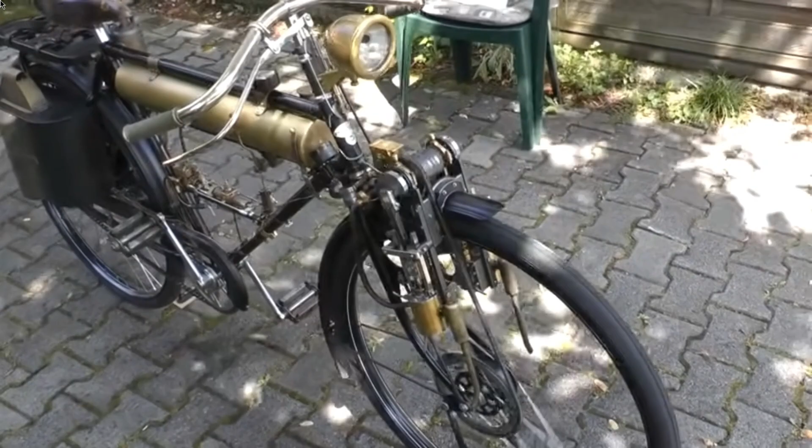First of all, the greatest thing about steam engines is that the water used in the steam engine typically is recycled and returned to the ecosystem. Here is how it typically works: water usage in a steam engine. Water is heated to produce steam, which is then used to drive turbines or pistons for mechanical work, such as electricity generation or locomotion in trains or steam cars. As the steam expands and does work, it loses some of its heat and energy and condenses back into liquid water.

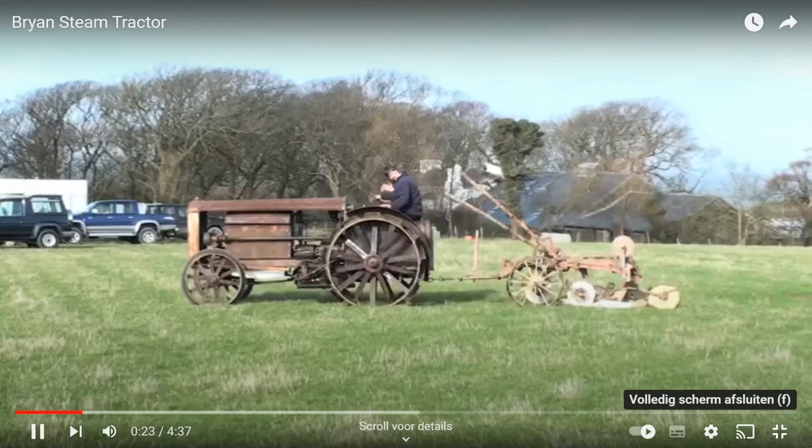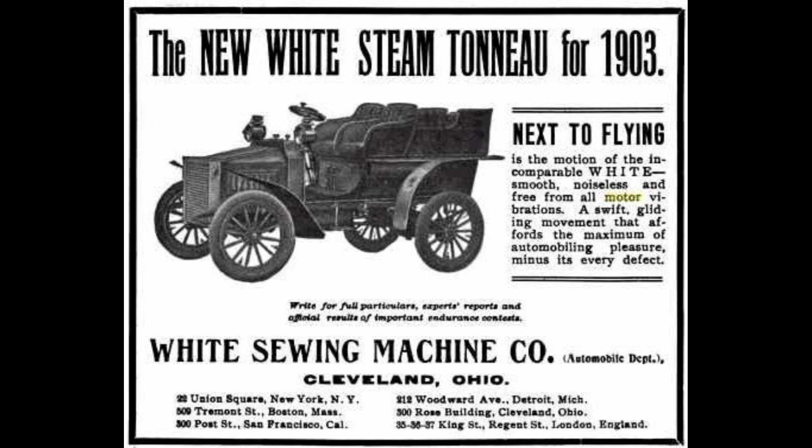Condensate recovery: the liquid water produced from condensed steam, known as condensate, is collected and often recycled within the steam system. Condensate recovery systems capture and reuse this water, feeding it back into the boiler to be converted into steam again. This recycling process minimizes water consumption and ensures efficient use of resources. Water quality and treatment: before being reused, condensate may undergo treatment to remove impurities and contaminants picked up during the steam cycle. This treatment process typically involves filtration, chemical treatment, and sometimes additional purification steps to ensure the water meets the quality standards.

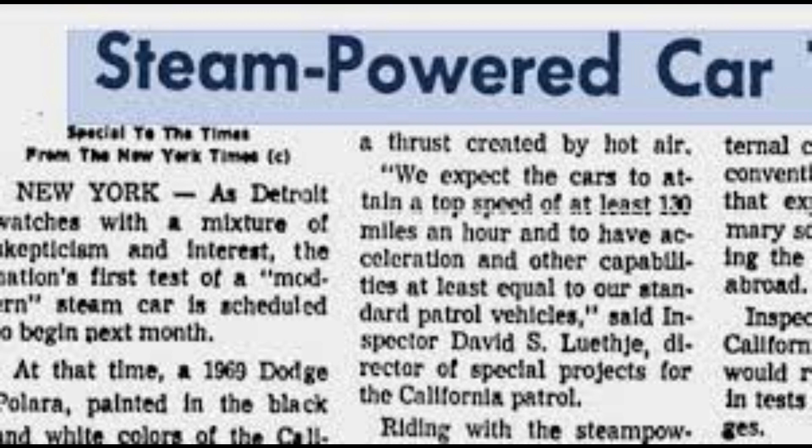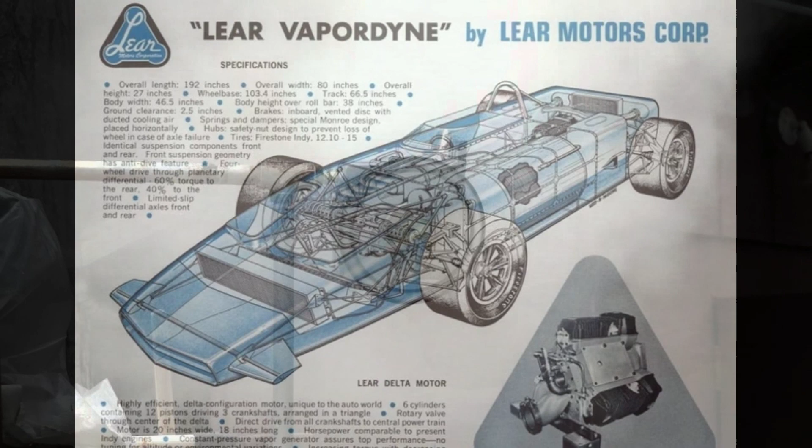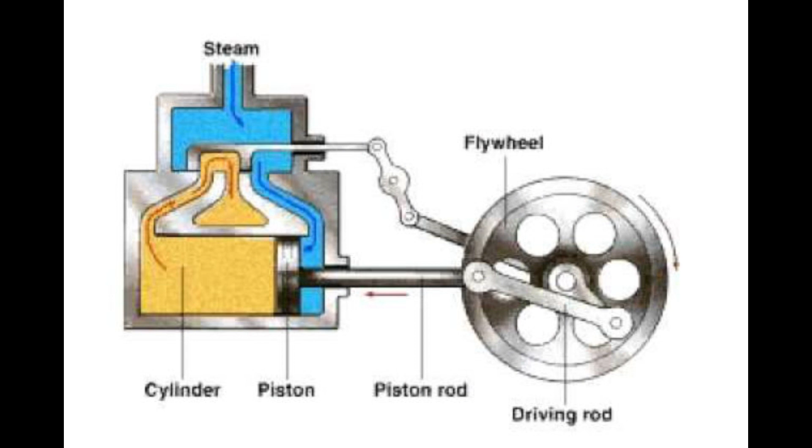Discharge into the ecosystem: while some water may be lost due to evaporation or blowdown from the steam system, the majority of the condensate is returned to the ecosystem. In industrial settings, condensate may be discharged into wastewater treatment systems or released back into natural water bodies, such as rivers or lakes, after treatment to meet regulatory requirements. Environmental consideration is essential to manage the discharge of condensate responsibly to minimize environmental impact. Proper treatment and monitoring ensure the discharged water meets water quality standards and does not harm aquatic ecosystems or human health.

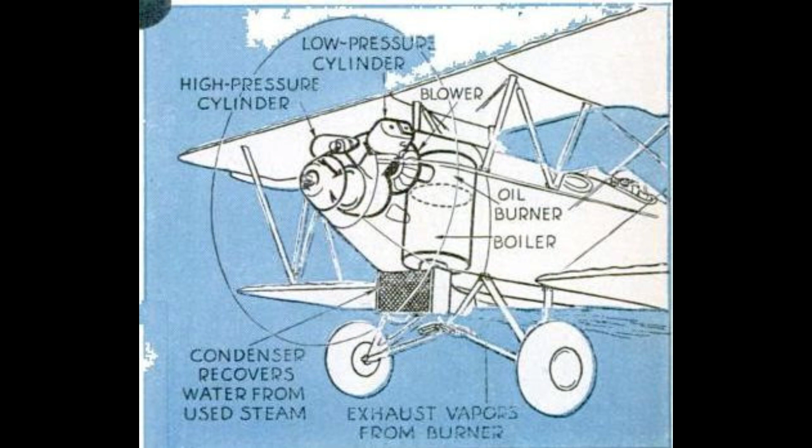Overall, the water used in steam engines undergoes a closed loop cycle where it is recycled and returned to the ecosystem with minimal waste. This approach maximizes water efficiency and minimizes the environmental footprint of steam engine operations.

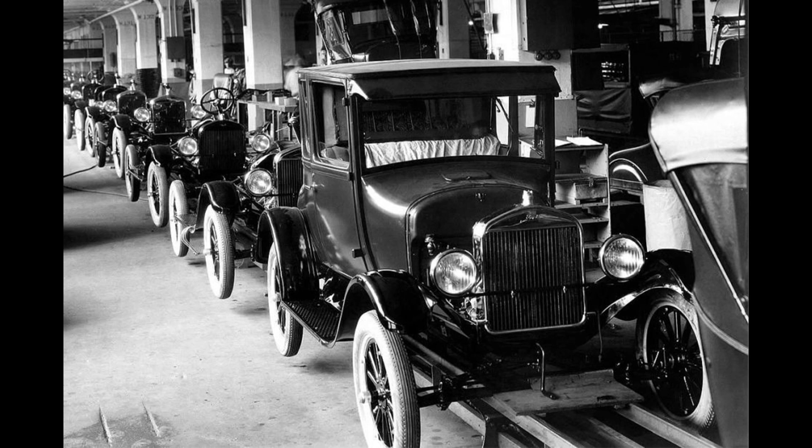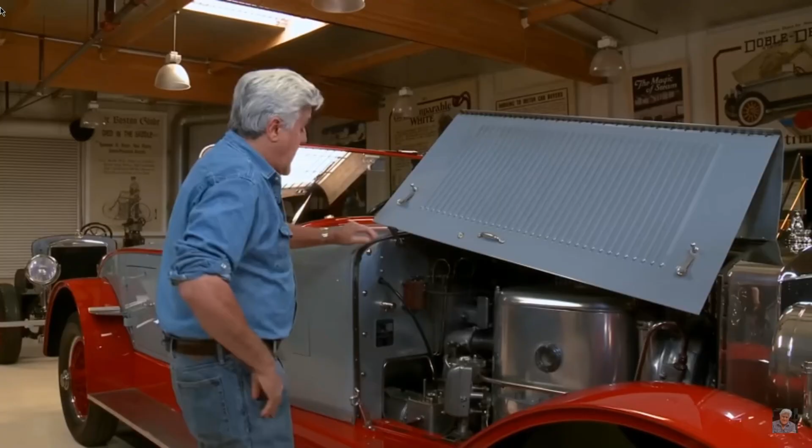In the vast landscape of technological evolution, few inventions have left such a decisive mark on human history as the steam engine, originating in the 18th century, but if you ask me, way before. These mechanical marvels ushered in the Industrial Revolution, transforming the world and catalyzing unprecedented progress. But while many may perceive steam engines as relics of the past, their potential in the modern era remains remarkably relevant, particularly in the pursuit of sustainable green energy solutions.

At their core, steam engines harness the power of steam to generate mechanical work by heating water to produce steam, which then drives pistons or turbines, converting thermal energy into motion. This fundamental principle may seem archaic, yet its applications in today's world are both diverse and promising.

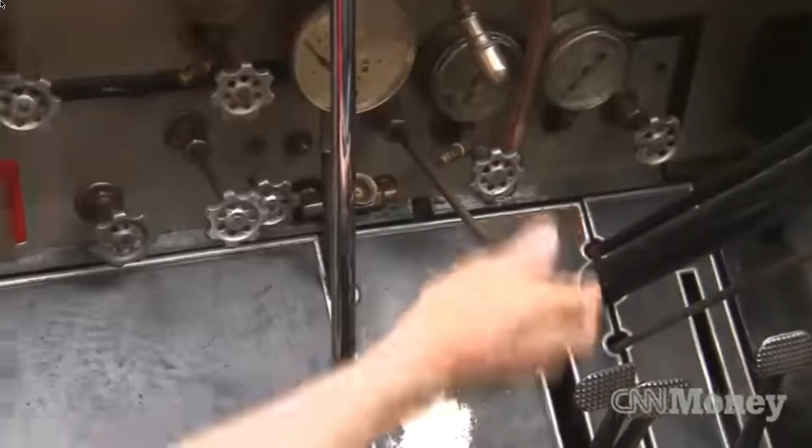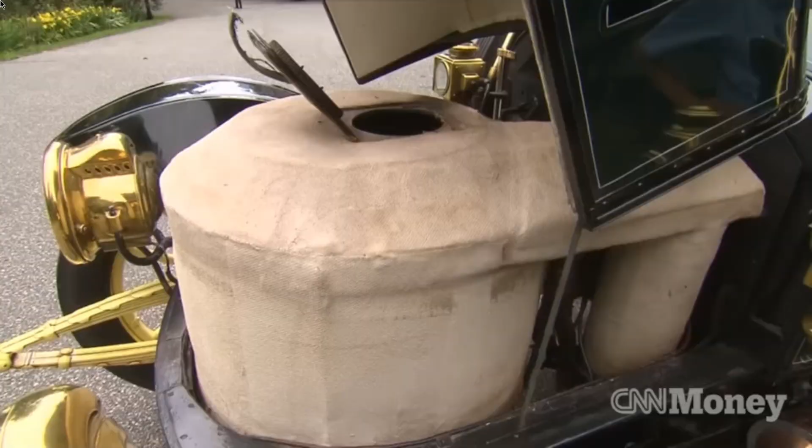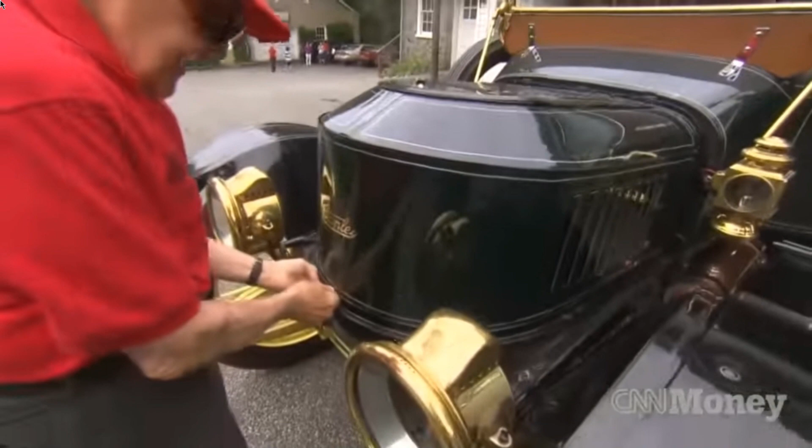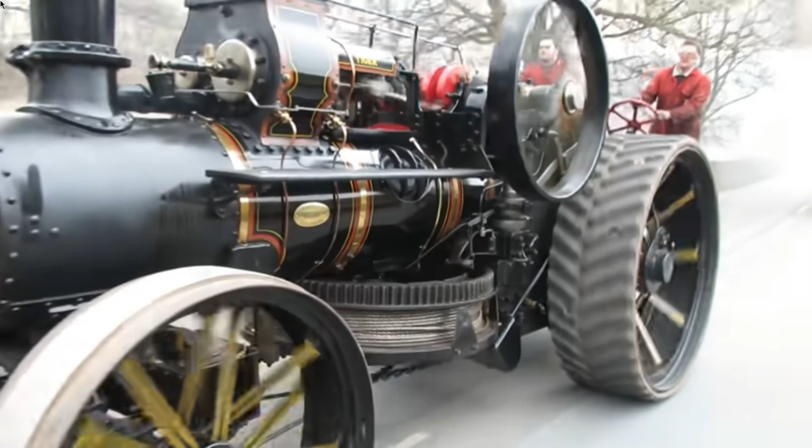Consider the pressing global imperative to transition away from fossil fuels and mitigate climate change. Steam engines offer a compelling alternative. Unlike traditional combustion engines that rely on finite and polluting fuel sources, steam engines can be powered by renewable inputs such as biomass, solar heat, and geothermal resources, presenting a pathway towards decarbonization and reduced reliance on non-renewable resources.

Furthermore, the versatility of steam engines extends beyond electricity generation. In industries ranging from manufacturing to transportation, these engines can drive a wide array of machinery and vehicles. Picture a modern steam-powered locomotive silently gliding along a railway station, emitting nothing but water vapor. Envision industrial processes powered by clean, renewable steam, driving productivity without compromising environmental integrity.

Moreover, the integration of steam engines with emerging technologies like advanced materials and digital control systems opens a new frontier of efficiency and performance. Through innovations in materials science, engineers can design steam engines that operate at higher temperatures and pressures, maximizing energy conversion efficiency. Sophisticated control algorithms optimize steam systems, ensuring seamless integration with renewable energy sources and grid networks.

Perhaps the most compelling aspect of steam engines lies in their inherent scalability. From small-scale decentralized applications to large-scale power plants, steam technology can be tailored to meet energy needs of diverse communities and industries. In regions lacking access to conventional power infrastructure, decentralized steam systems offer a reliable and sustainable energy solution, empowering local communities and driving economic development.

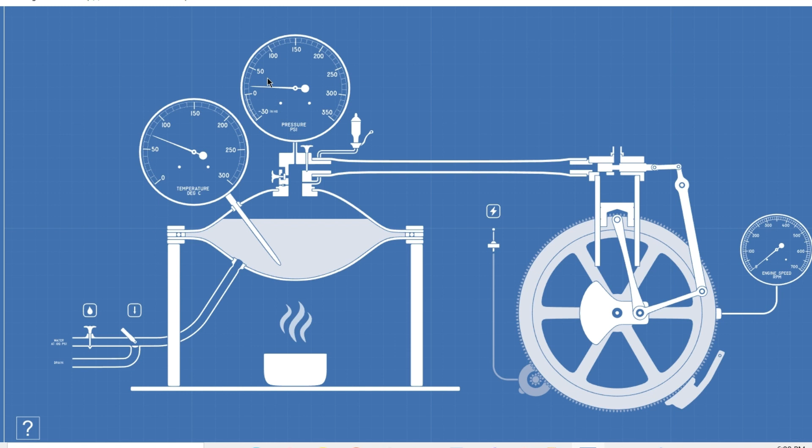The age of steam may have dawned centuries ago, but its brightest days lie ahead, fueled by the boundless potentials of green energy and human ingenuity.

Improving the efficiency of steam engines while reducing water consumption is a key challenge in modernizing this technology for clean energy. Here are some examples of how this can be achieved. With advanced boiler system design, utilizing advanced materials and engineering techniques can enhance boiler efficiency, allowing steam engines to extract more energy from the same amount of water. High efficiency boilers with improved heat transfer surfaces can minimize heat losses and optimize steam generation.

Also, condensing systems: incorporating condensing systems into the steam engine enables the recovery of water vapor from exhaust steam by condensing it back into liquid water. This process recycles water within the system, reducing overall water consumption and increasing efficiency.

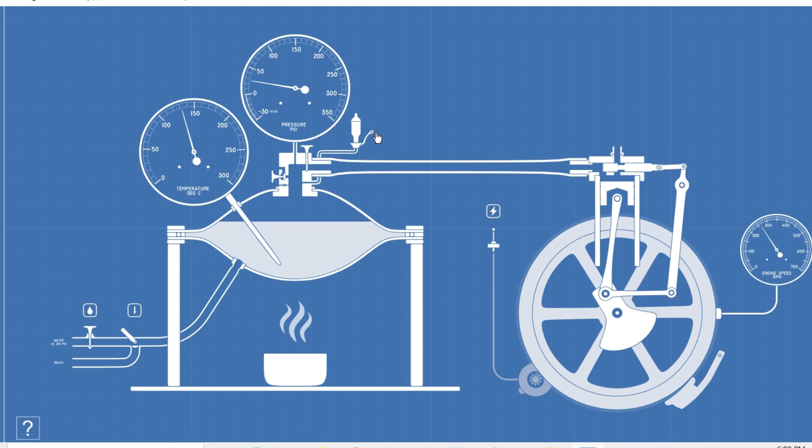Another way is a closed loop system. Implementing closed loop steam systems minimizes water losses by recirculating condensed water back into the boiler. By continuously circulating water within a closed loop system, steam engines can operate with minimal water replenishment, making them more efficient and sustainable.

Water treatment technologies: investing in water treatment technologies ensures the quality and longevity of steam engine components. Purification processes such as reverse osmosis or ion exchange can remove impurities from feed water, preventing scaling and corrosion that can reduce efficiency and increase water consumption.

Waste heat recovery: integrating waste heat recovery systems allows steam engines to utilize excess heat from various processes, reducing the need for additional fuel or water input. By capturing and repurposing waste heat, steam engines can operate more efficiently while conserving water resources.

Then you have optimized steam turbines. Upgrading steam turbine designs with modern materials and aerodynamic optimizations can enhance energy conversion efficiency. High efficiency turbines extract more energy from steam, requiring less water input for the same power output.

Also, variable speed control: implementing variable speed control mechanisms allows steam engines to adjust their operation according to demand, optimizing energy usage and water consumption. By modulating steam flow rates and engine speed, variable speed control ensures steam engines operate at peak efficiency under varying load conditions.

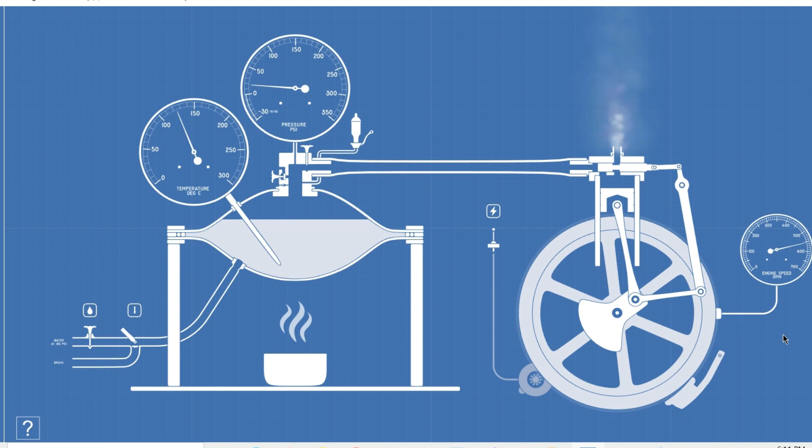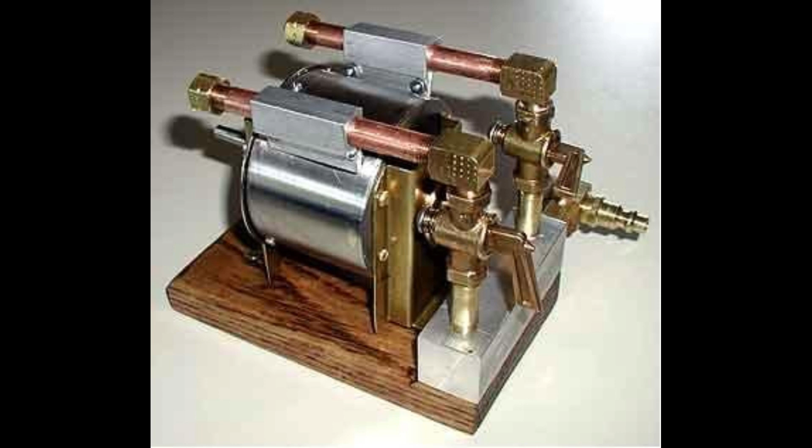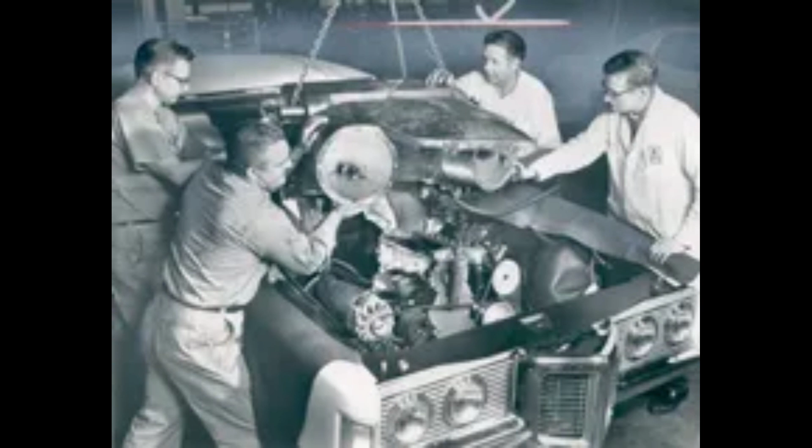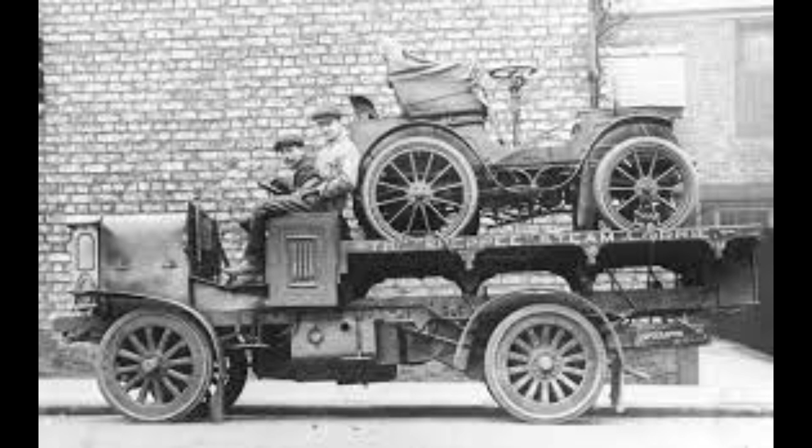Cogeneration systems as well: deploying cogeneration systems that produce both electricity and heat can improve overall efficiency and water usage. By utilizing waste heat from electricity generation for heating purposes, cogeneration systems maximize the utilization of energy resources while minimizing water consumption. By incorporating these strategies, steam engines can be transformed into highly efficient and sustainable energy solutions, capable of meeting the demands of the modern era while minimizing their environmental footprint.

So of course you want to run the engine on minimal heat. You don't want to be stoking coals like in old steam trains. Running a steam engine on minimal heat requires careful consideration of several factors to ensure efficient operation while conserving energy.

Here's an explanation on how this can be achieved.

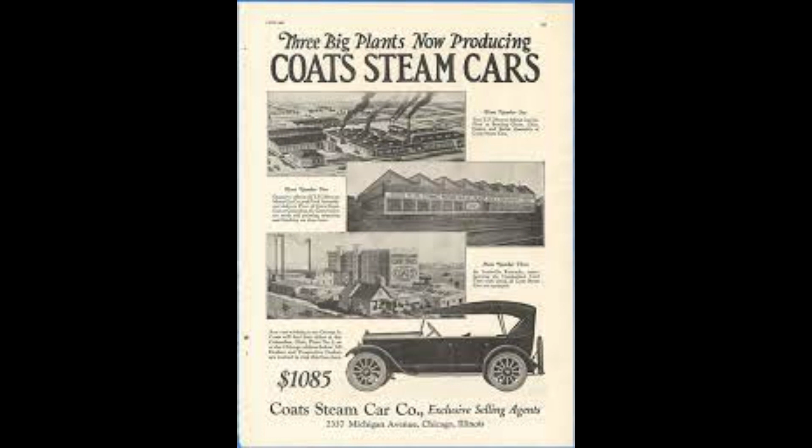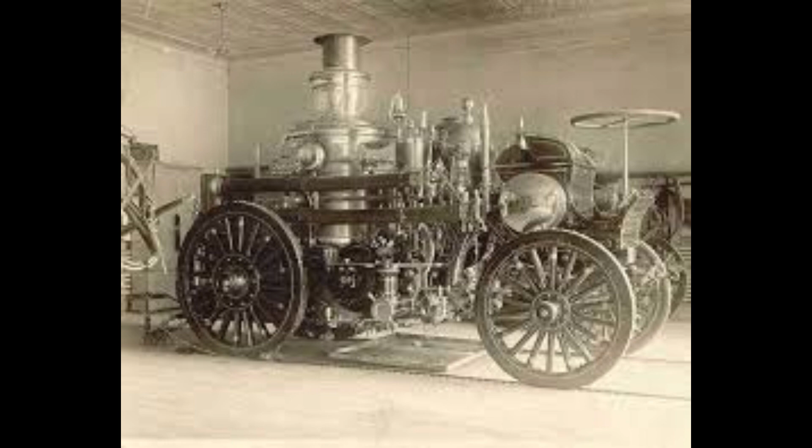Efficient boiler design: the heart of any steam engine is its boiler, where water is heated to produce steam. Utilizing an efficient boiler design is crucial for running the engine on minimal heat. Insulating the boiler properly helps retain heat, reduces heat loss to the surroundings, and allows the engine to operate efficiently with less fuel input.

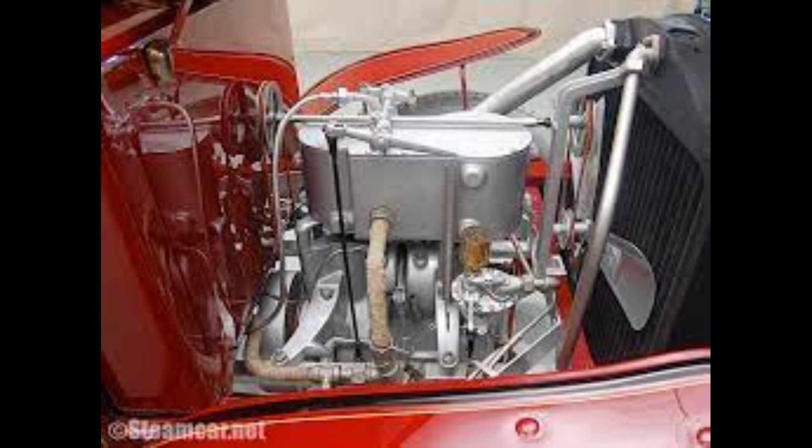Optimized fuel combustion: when using traditional fuel sources such as coal, wood, or biomass, it's essential to optimize the combustion process to extract the maximum amount of heat energy. Proper air-fuel ratio control and combustion chamber design ensure efficient fuel utilization, allowing the steam engine to generate adequate steam with minimal heat input.

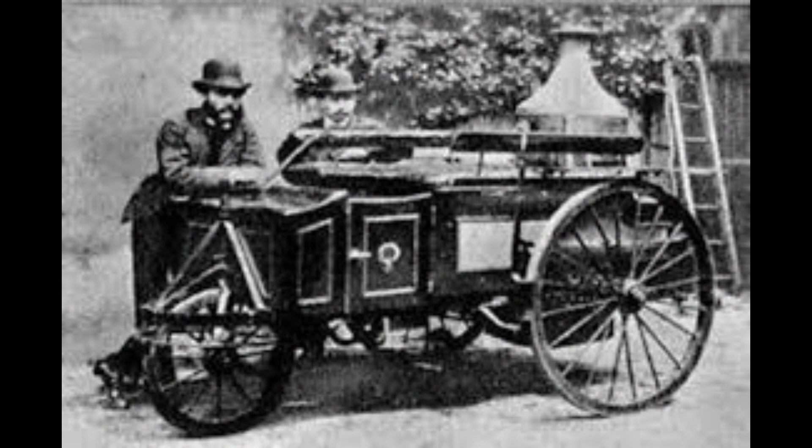Heat recovery systems: implementing heat recovery systems allows the steam engine to utilize waste heat from various processes. Heat exchangers can recover heat from engine exhaust gases or cooling water, preheating the boiler feed water and reducing the amount of heat required to generate steam. This approach maximizes energy efficiency and minimizes the need for additional heat input.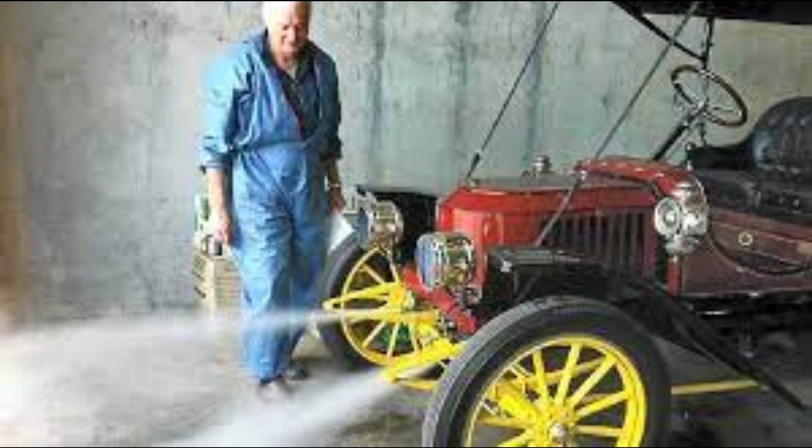Closed loop steam systems recycle water within the system, reducing the amount of fresh water required to generate steam. By condensing exhaust steam back into liquid water and returning it to the boiler, closed loop systems minimize water consumption while maintaining steam engine efficiency. Additionally, condensate recovery systems capture and reuse condensate steam, further reducing water usage.

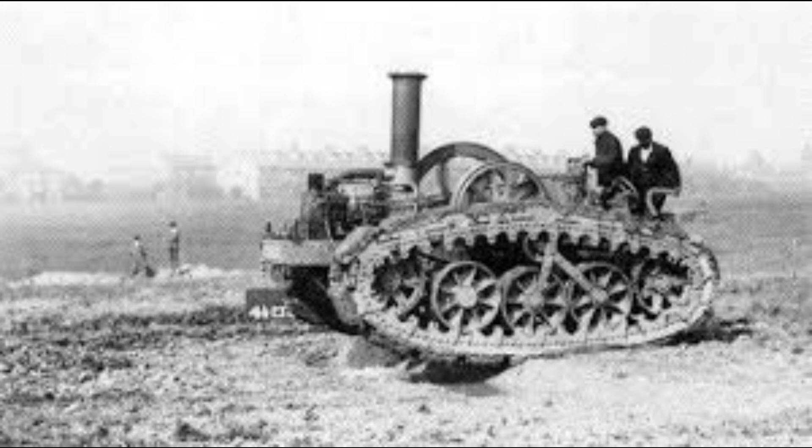Low pressure steam engines: utilizing low pressure steam engines can allow for operation with lower heat input. Compared to high pressure systems, low pressure steam engines are well suited for applications where high power output is not required, such as small scale industrial processes or agricultural machinery. By operating at lower pressures, these engines can achieve reasonable efficiency with minimal heat input.

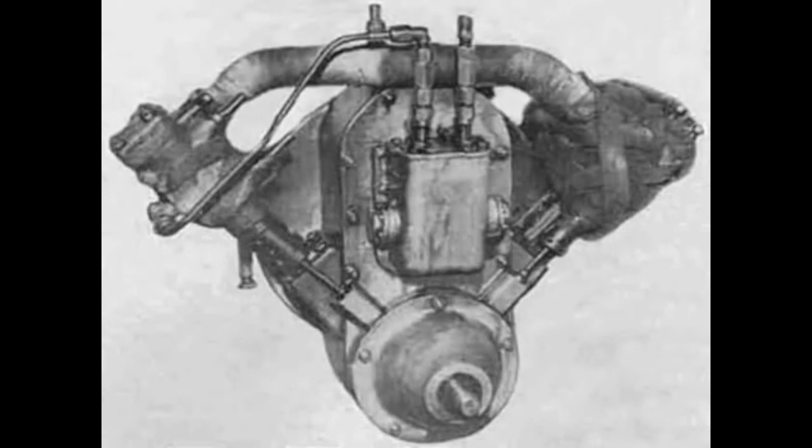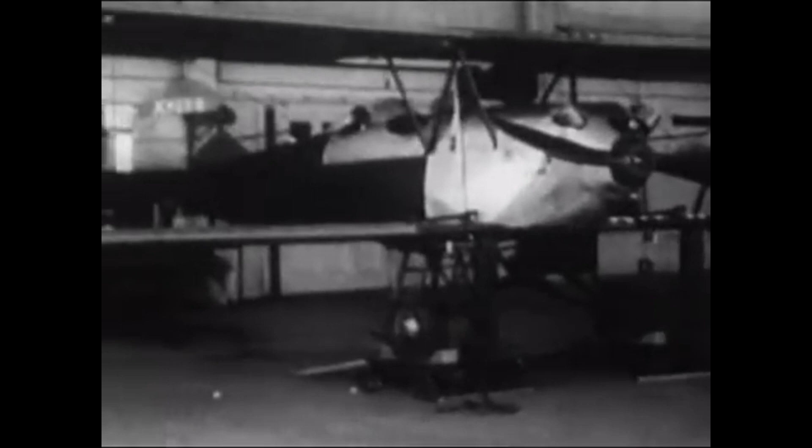Variable load management: managing the steam engine's load according to demand helps optimize energy usage and heat input. By adjusting steam flow rates and engine speeds based on workload requirements, the engine can operate more efficiently with less heat. Variable load management systems monitor demand in real time and modulate engine operation accordingly, ensuring optimal performance while conserving energy.

Thermal energy storage: this goes back to, for example, my idea of a sand battery. Incorporating thermal energy storage systems allows excess heat generated during periods of low demand to be stored for later use. Thermal storage mediums such as molten salts, sand, or phase change materials can store heat efficiently and release it when needed to supplement heat input to the boiler. By storing excess heat, steam engines can operate continuously on minimal heat input even during fluctuations in demand.

By implementing these strategies, it's possible to run a steam engine on minimal heat while maintaining efficiency and sustainability. Whether for industrial applications, agricultural machinery, or decentralized power generation, optimizing steam engine operation for minimal heat input offers a viable pathway towards energy conservation and environmental stewardship.

There were also steam planes, and one notable example of a steam powered aircraft is the Besler steam plane, also known as the Besler steam airplane, designed and built by William Besler, an engineer with a background in steam locomotive technology. This experimental aircraft took flight in the 1930s.

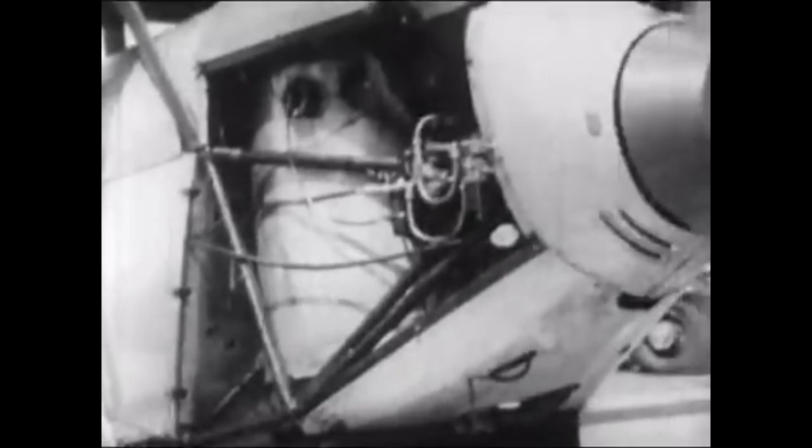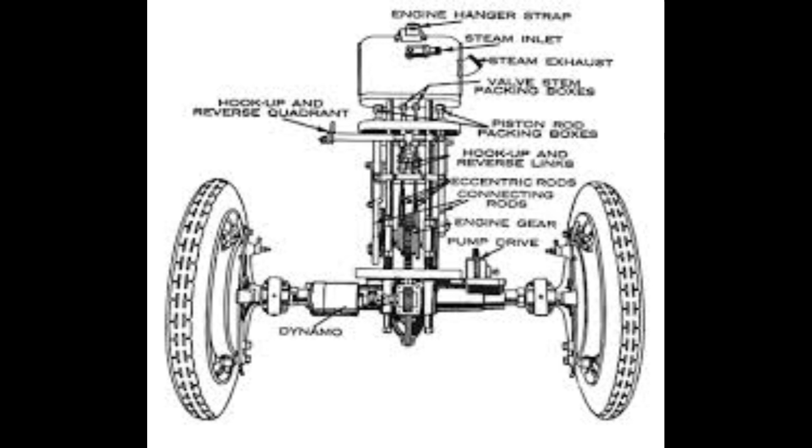On April 12, 1933, the Besler steam plane successfully completed its maiden flight at Oakland Airport in California, USA. It flew for approximately 45 minutes, reaching an altitude of around 2,000 feet and achieving a top speed of about 85 miles an hour, that is 610 meters... 137 kilometers an hour.

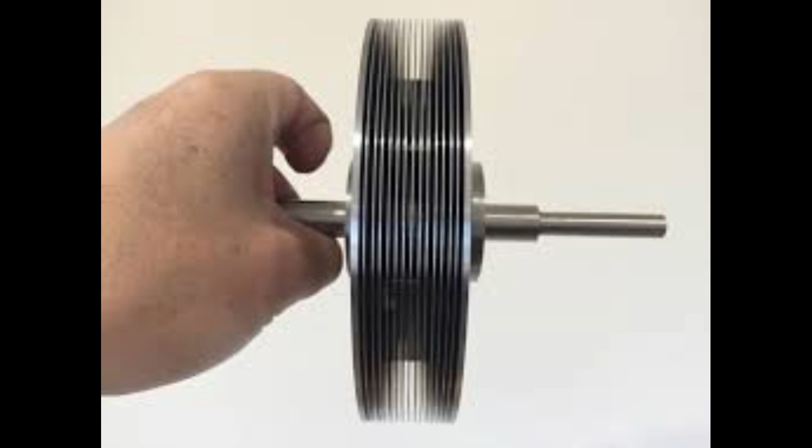While the Besler steam plane demonstrated the feasibility of steam powered flight, it faced several challenges, including limited range, performance, and the complexity of the steam propulsion system. Despite its successful flight, the project ultimately did not progress beyond the experimental stage, and the aircraft was not widely adopted. Nevertheless, the Besler steam plane remains an intriguing example of early efforts to explore alternative propulsion technologies in aviation. Its legacy continues to inspire ongoing research and experimentation in the quest for more efficient and sustainable aircraft propulsion systems.

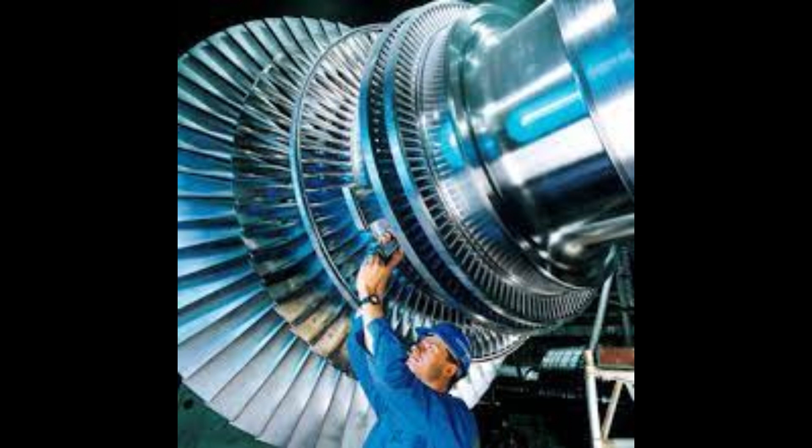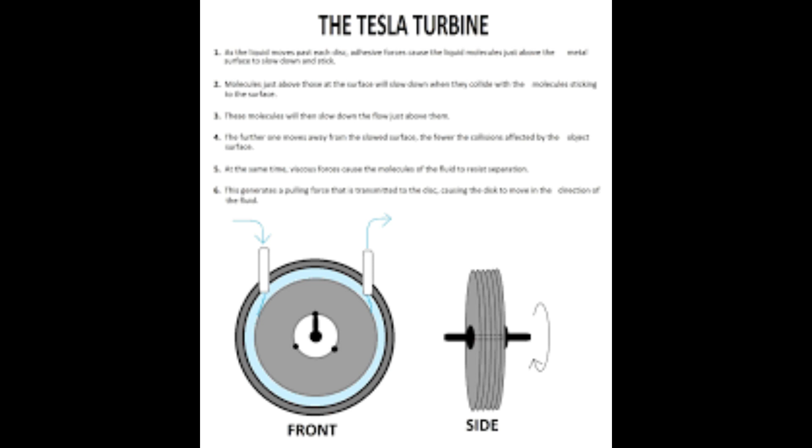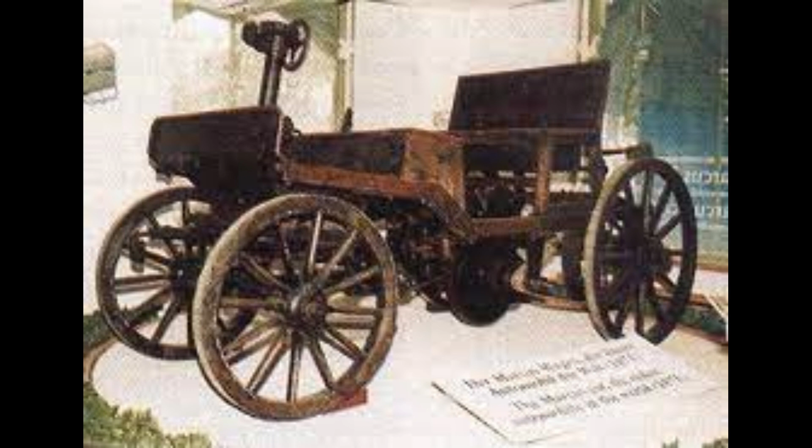Combining this all with atmospheric water generation, which I already made videos about, but will go more into depth right now. Combining atmospheric water generation (AWG) technology with steam engines presents an innovative approach to sustainable energy and water production. Here's how such a system could work and its potential benefits. Atmospheric water generation utilizes condensation principles to extract water vapor from the air, even in arid or humid climates.

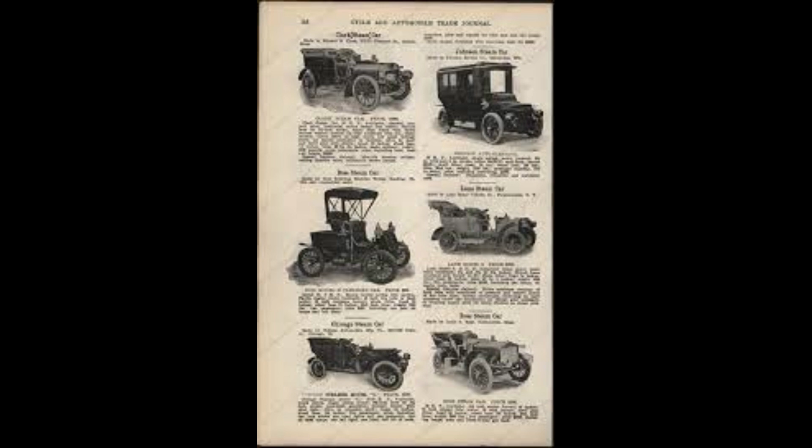This process typically involves cooling the air to its dew point, causing water vapor to condense into liquid water, which is then collected and purified for use.

Integration with steam engines: in a system combining atmospheric water generation with steam engines, the generated water could be used as feed water for steam production. The collected water would be purified to remove impurities and then fed into the boiler of a steam engine system. As the water is heated to produce steam, it undergoes phase change, expanding and generating mechanical energy to drive turbines or pistons.

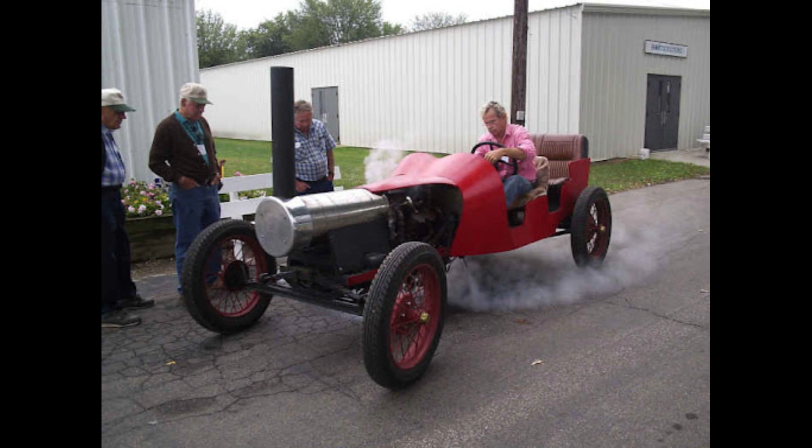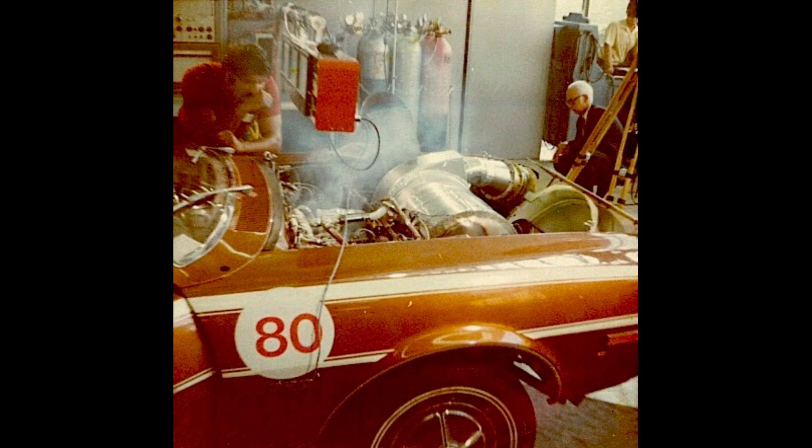Renewable energy sources such as solar thermal energy or geothermal heat could be utilized. Solar concentrators or geothermal heat exchangers could provide the necessary thermal energy to power the steam engine systems, ensuring the overall process is sustainable and environmentally friendly.

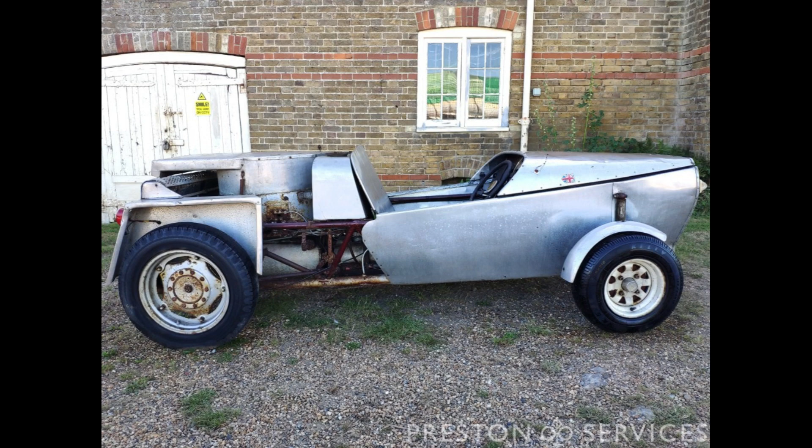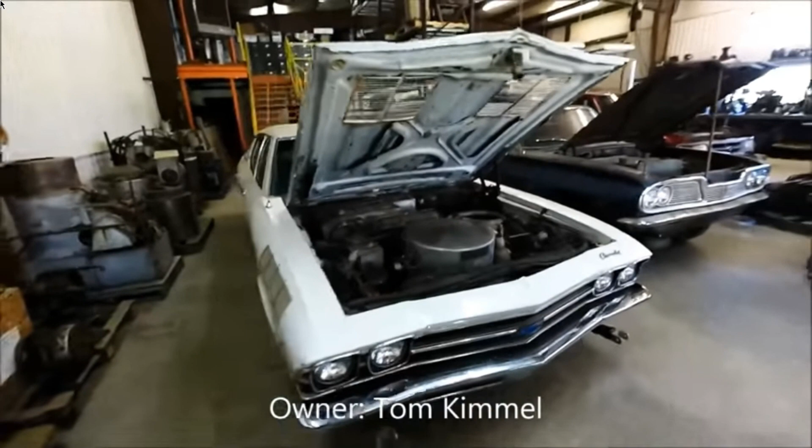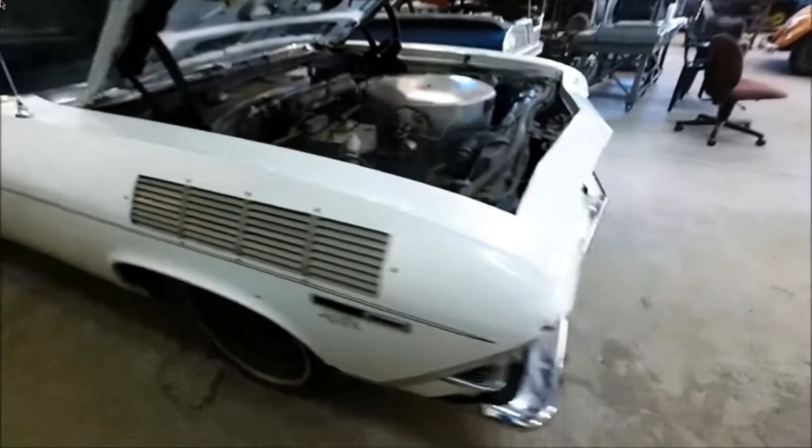Synergetic benefits: integrating AWG systems with steam engines offers synergetic benefits. Firstly, it provides a continuous source of water independent of traditional water sources such as rivers or groundwater, making it particularly valuable in regions facing water scarcity. Secondly, it enables the generation of clean renewable energy through steam power, contributing to efforts to reduce reliance on fossil fuels and mitigate climate change.

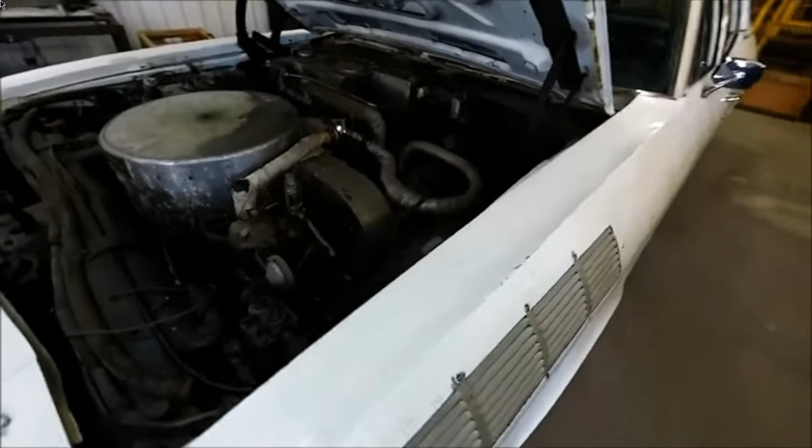Decentralized applications: this combined system could be deployed in decentralized applications such as off-grid communities, rural areas, or disaster relief efforts where access to both water and energy is limited. By providing both essential resources in a self-sustaining manner, it enhances resilience and improves the quality of life in underserved regions.

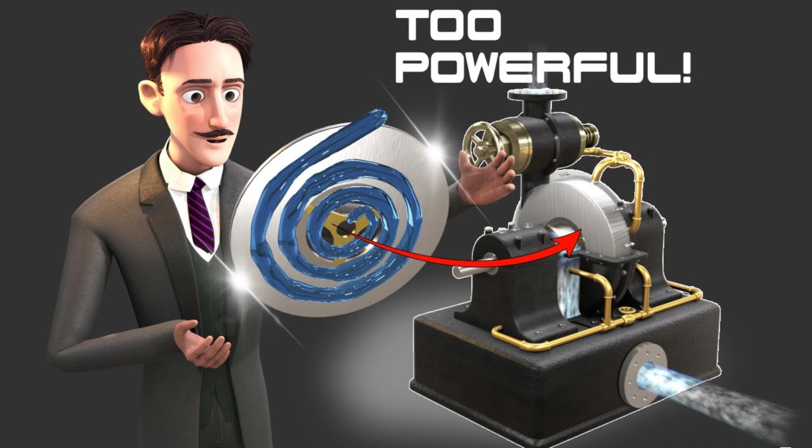Efficiency and sustainability: by utilizing renewable energy inputs and recycling the water through the steam cycle, the integrated AWG and steam engine systems promote energy and water efficiency. It minimizes reliance on external resources and reduces environmental impact, making it a sustainable solution for both water and energy needs.

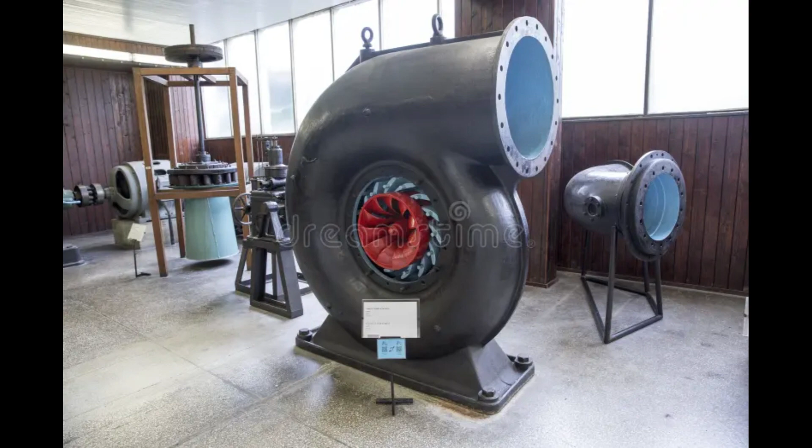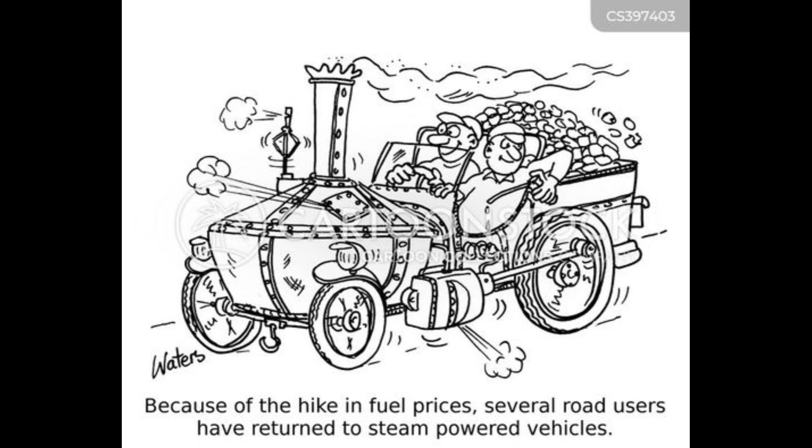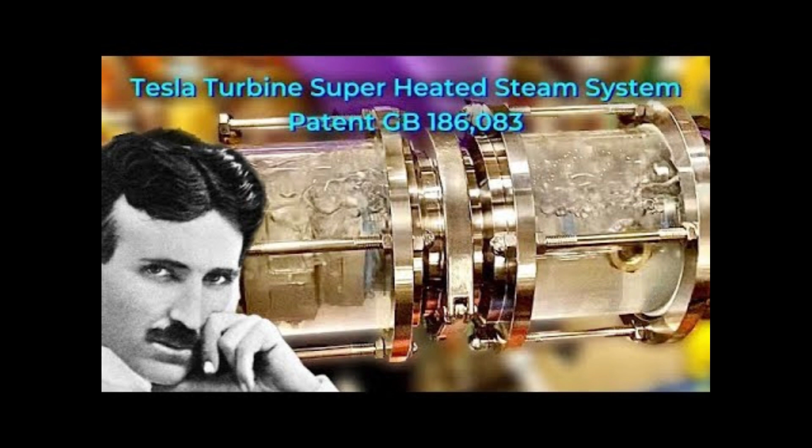Overall, combining atmospheric water generation with steam engines presents a compelling synergy between water production and renewable energy generation. This integrated approach offers potential solutions to address water scarcity, energy access, and environmental sustainability challenges, particularly in areas where it's needed most. Nikola Tesla, renowned for his groundbreaking contributions to electrical engineering and technology, also developed a revolutionary steam turbine in the early 20th century.

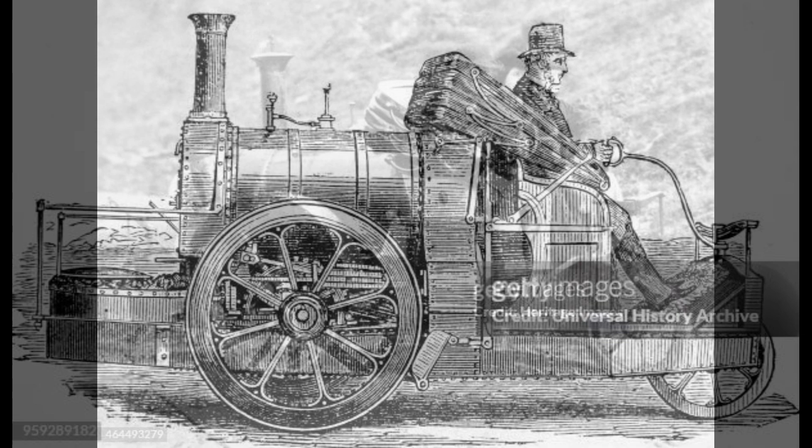Tesla's steam turbine, known as the Tesla turbine or the boundary layer turbine, departed from conventional turbine designs of the time and offered several innovative features.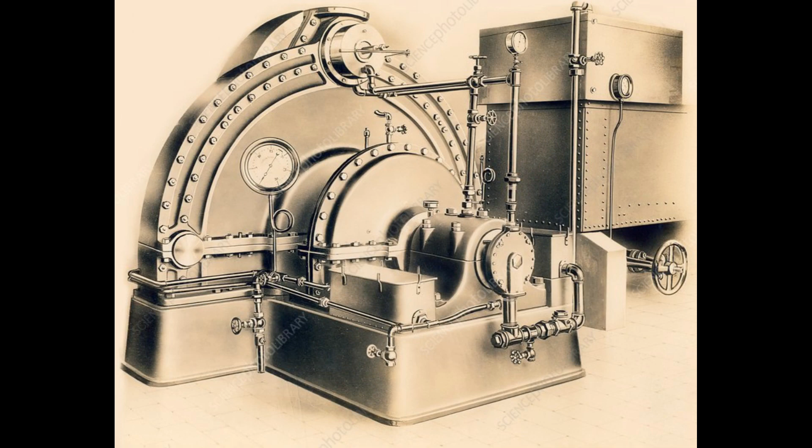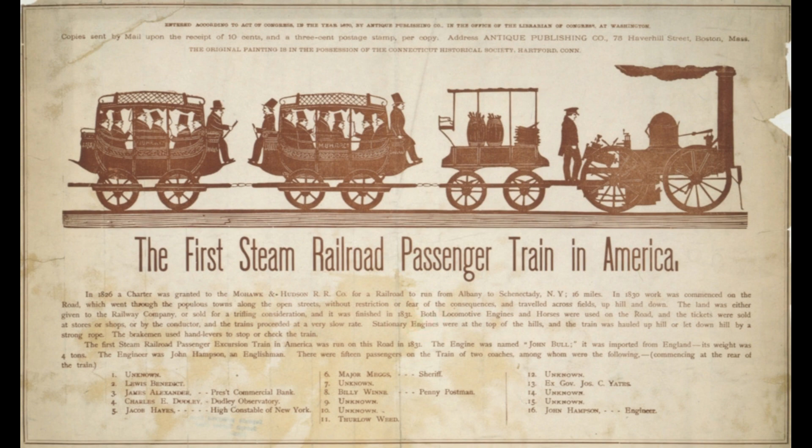1. Bladeless design. One of the most distinctive features of the Tesla turbine is its bladeless design. Instead of using traditional blades to extract energy from the steam, the Tesla turbine relies on a series of closely spaced, smooth discs arranged on a shaft. As steam enters the turbine housing, it encounters the discs, creating a boundary layer effect that transfers momentum to the discs and causes them to rotate.

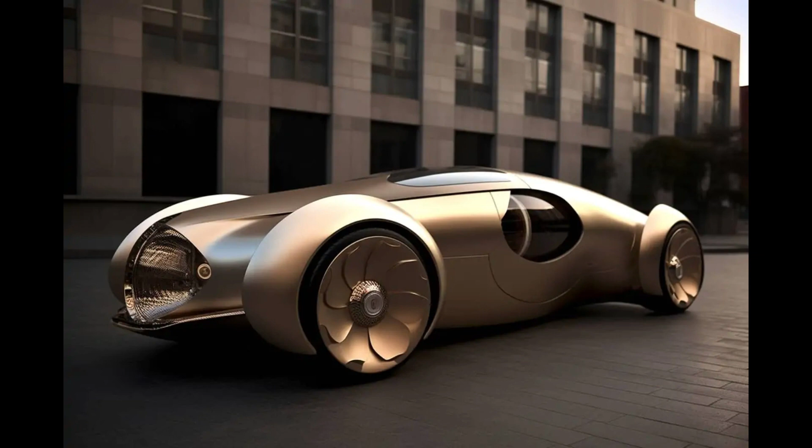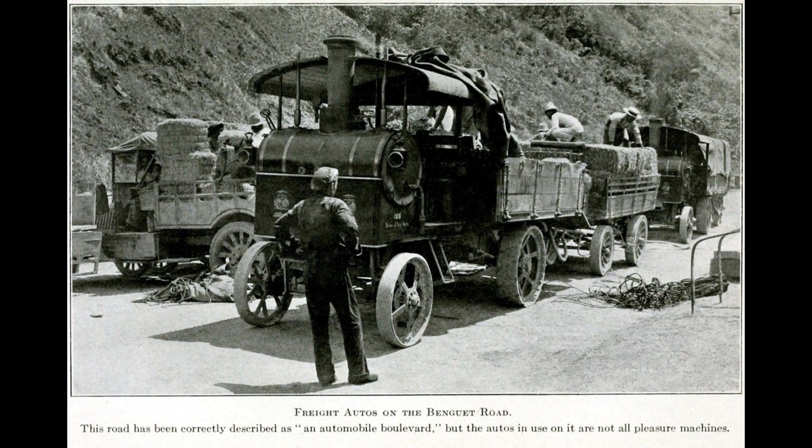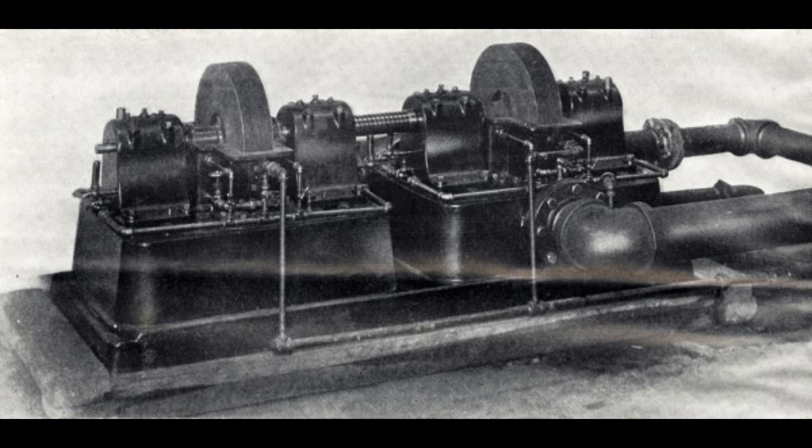2. Efficiency and simplicity. Tesla believed that this turbine design offered significant advantages over traditional turbine designs in terms of efficiency, reliability, and simplicity. The absence of blades reduced friction and wear and tear, resulting in smoother operation and potentially longer service life. Additionally, the design was less prone to vibration and stress, which contributed to its reliability.

3. Scalability and versatility. Tesla envisioned his turbine as a versatile and scalable technology that could be applied in various industrial and power generation applications. He proposed using the turbine for electricity generation, propulsion systems for vehicles and aircraft, and even pumping and compressing fluids in industrial processes.

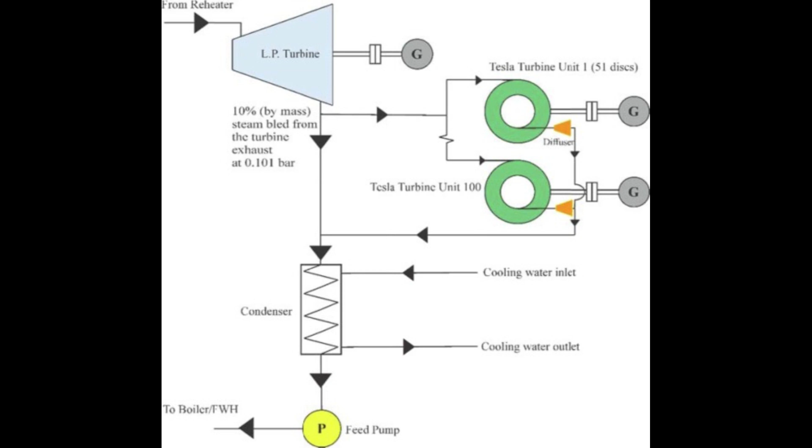Experimental applications: Tesla conducted numerous experiments and demonstrations to showcase the capabilities of his turbine design. He built prototypes and conducted tests to evaluate its performance and efficiency, garnering interest from investors and engineers. However, despite its promising features, the Tesla turbine faced challenges in commercialization and widespread adoption.

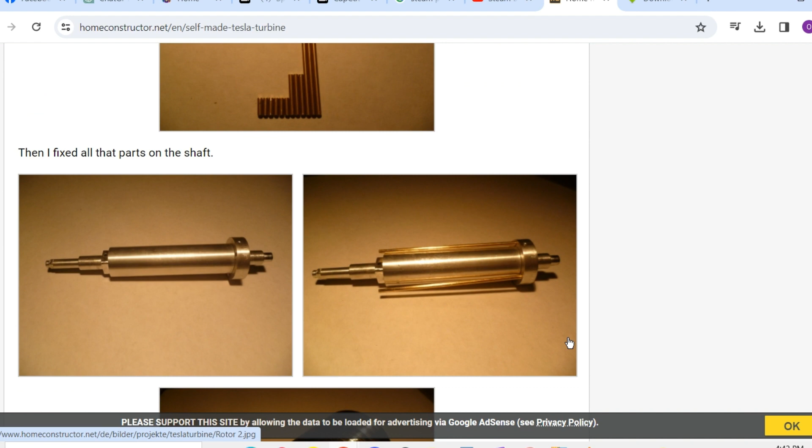While Tesla's steam turbine did not achieve the same level of commercial success as his electrical inventions, its innovative design and potential applications continue to inspire research and experimentation in turbine technology. Today, the principles underlying the Tesla turbine are studied and applied in various fields, contributing to advancements in turbine design and efficiency.